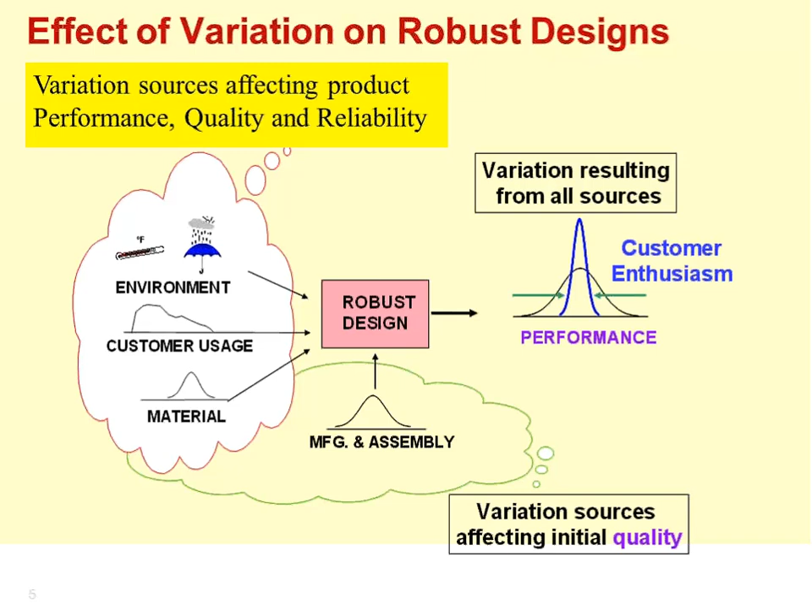So that is also a factor. Like I said, this is a pretty generic approach to engineering, but that kind of shows you the essence where Monte Carlo simulation can be very useful. So you're assessing performance, quality, reliability, and a lot of other factors. And if you understand your product well enough, and if you can model those input variables, you can have a pretty good understanding of what's going to come out as a result of your design.

Interesting thing is, when we were working on the 5th edition of this book, and I definitely wanted to include Monte Carlo, I did some search, and what was surprising, there's a lot of books mentioning Monte Carlo, books dedicated to Monte Carlo, but it seems like it's always kind of extreme. Either you get the book just about Monte Carlo with all details and modeling and all the hardcore mathematics going into this, or you get the book on the other spectrum where someone mentions Monte Carlo in maybe several paragraphs, or maybe a sub-chapter like 4.2.1, where it says, yeah, Monte Carlo is a great method, and you can model things and you can simulate inputs and get the outputs.

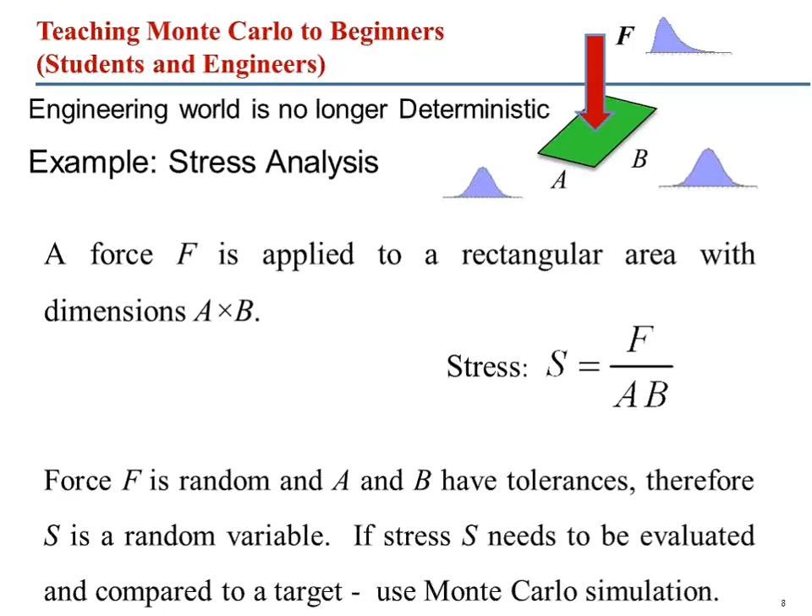But the question is, basically all those variables are random, and even though we think we know A and B, in the real world they have tolerances. And also force, in this particular case, I assign it as a random force. So again, stress is a random variable, and it needs to be evaluated and compared to a target. So I set up a target and say, okay, in my design, my stress should not exceed a certain value, and that's going to be my next slide.

Okay. So the next step here is I give them a really brief explanation of what Monte Carlo does. It's basically a brute force method, and we'll go back to that simple example where you have what's called a transfer function. In this case with stress, it's basically how you calculate stress. It's force divided by A times B, and then you have random inputs which you process with this transfer function, and you get the output. When you simulate those random inputs, your output obviously is also random, and that's what you get at the end and do the analysis of your output.

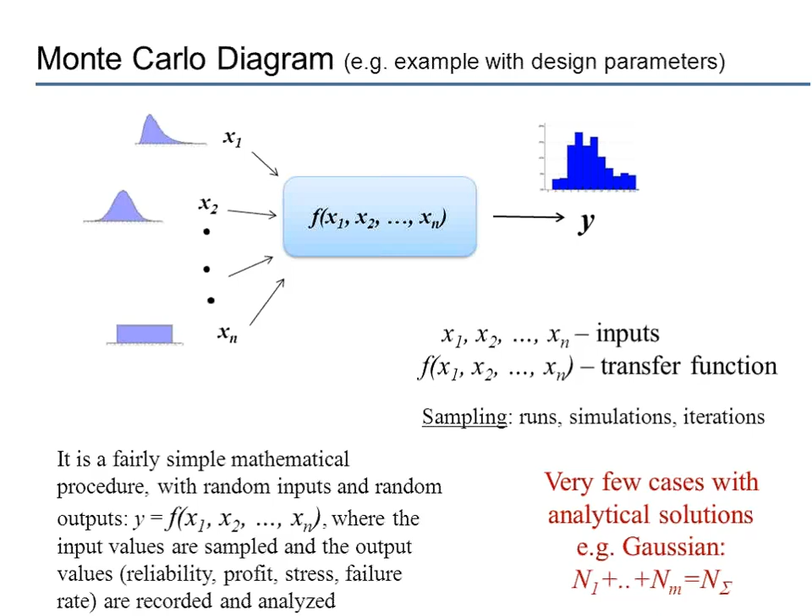And the key here is that when you have random inputs, there's really no way to solve this analytically, and the only case I'm aware of where you can solve this analytically is when you have a sum of normally distributed random variables, then your output is also a normally distributed random variable with the mean equal to the sum of the means, and standard deviation is the square root of the sum of squares. But that's the only thing I can think of. Everything else, Monte Carlo is pretty much, if not the only way, the best way to solve this.

Then I do a little bit of joking and say, okay, what do you need to run Monte Carlo? You need the latest XK6 Cray supercomputer. You need to have a PhD in statistics and specialized, very expensive Monte Carlo simulation software. But then I say, no, actually, you don't really need any of that, and you can do Monte Carlo pretty simply. You just need a regular PC, and a Mac will do the job just fine. You can't use your cell phone for that, at least not yet, but I haven't tried. You need a basic understanding of statistical distributions, both discrete and continuous. And you can start with simple Excel spreadsheets without even knowing how to use macros, just basic Excel.

So for that, we move into the section where we try to do Monte Carlo with just plain Excel. Most people know that there's a random generator built into Excel, called RAND, which generates random numbers between 0 and 1. But most people don't know that you can use that function to model pretty much any statistical distribution. You just need to use it a little bit differently. So when we start with the rectangular distribution, you can change that 0 to 1 to A to B by using this function, A plus (B minus A) times RAND.

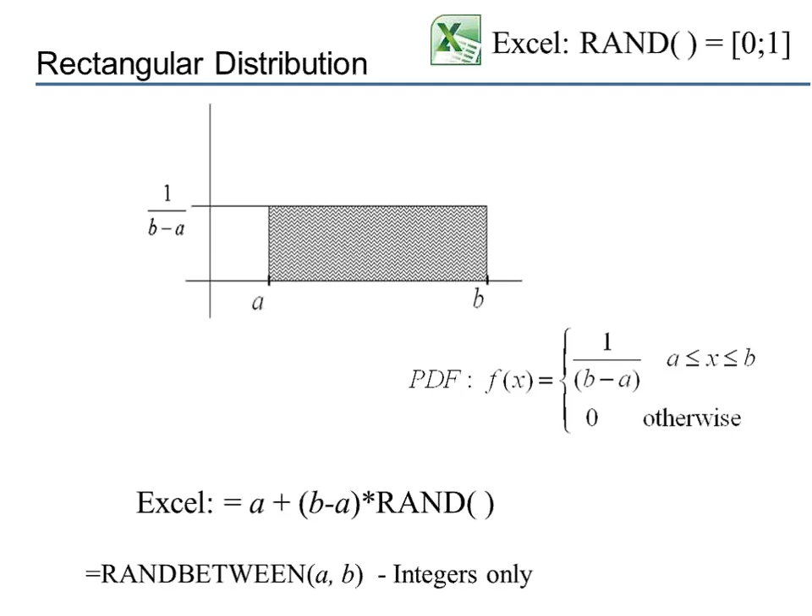And there's even a built-in RANDBETWEEN function, if you need to generate only integers, like if you're trying to model sales volume or attendance or something. Then there's also a very useful distribution, which is not a classical distribution, but is very commonly used by engineers, which is triangular, where you know the most likely value of a variable, and you know you cannot go below one value, in this case A, and you cannot go above another value, B.

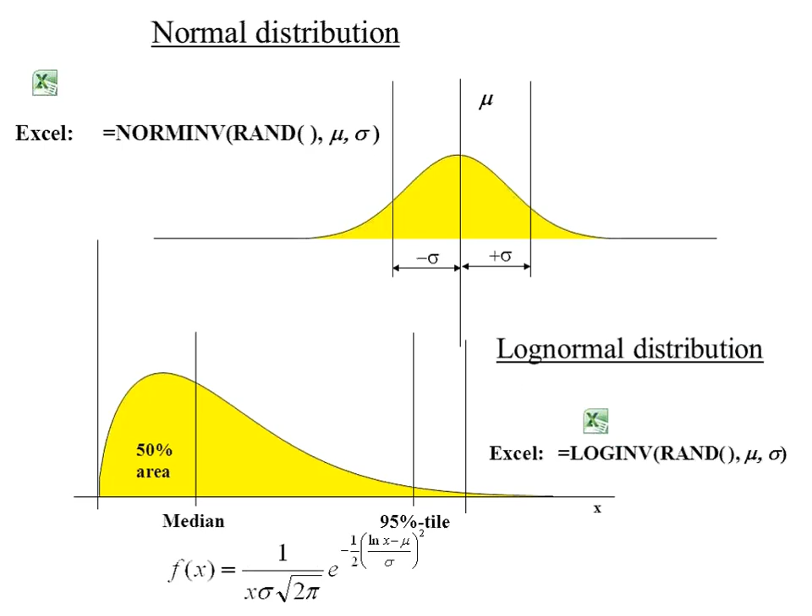Then actually moving to something a little bit more complicated, like normal or lognormal distribution. Most people on the call probably know normal and lognormal very well. And again, it's a pretty simple Excel function where you can model both, like NORMINV or LOGINV function, using that random generator. Again, it's there. It's just most Excel users don't know that.

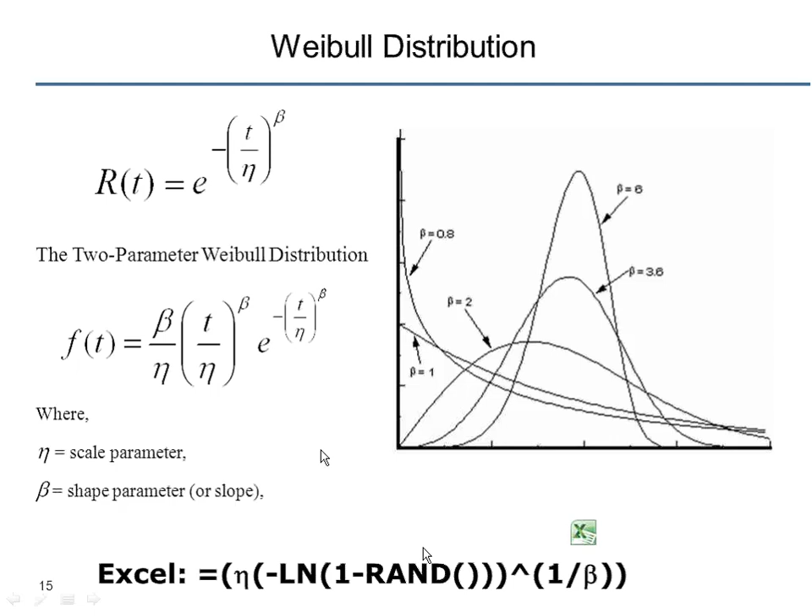Another popular distribution among reliability engineers is exponential, which is actually a special case of Weibull, and obviously it's even easier to model. But also in the book, I put together a table for many other distributions, how you can model them in Excel. So for the convenience.

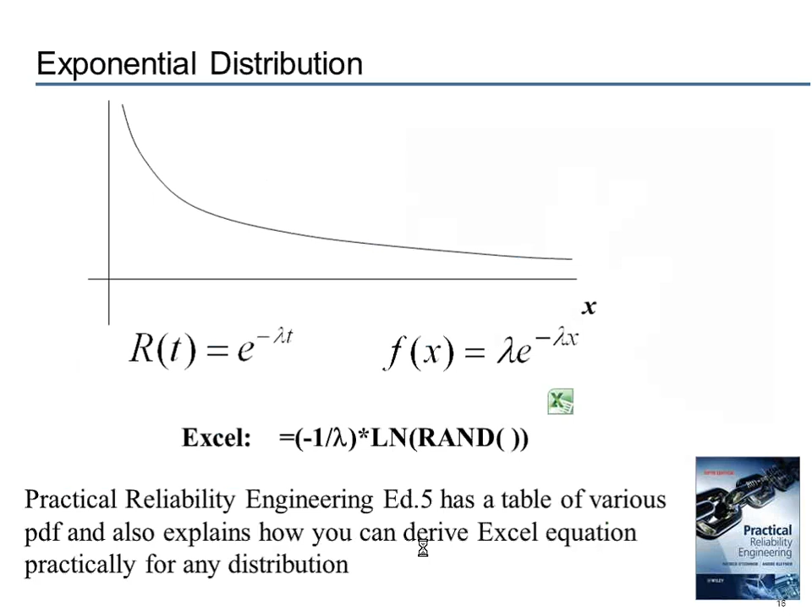So going back to that simple example, we have random force applied to area A times B, and we assign certain parameters. So A is 2 centimeters with a tolerance of ±1 millimeter. B is 3 centimeters with tolerance 1.5. And with force, I make it a little bit more complicated.

Let's say we don't know what this force is, but we can take some measurements and try to come up with an appropriate distribution. The structure is expected to function properly within the elastic strain range, where the probability of exceeding the yield strength of 30 megapascals, which is 30 times 10 to the 6 newtons per meter square, needs to be estimated. So the idea is to see what's the probability of exceeding that number with the data we're given.

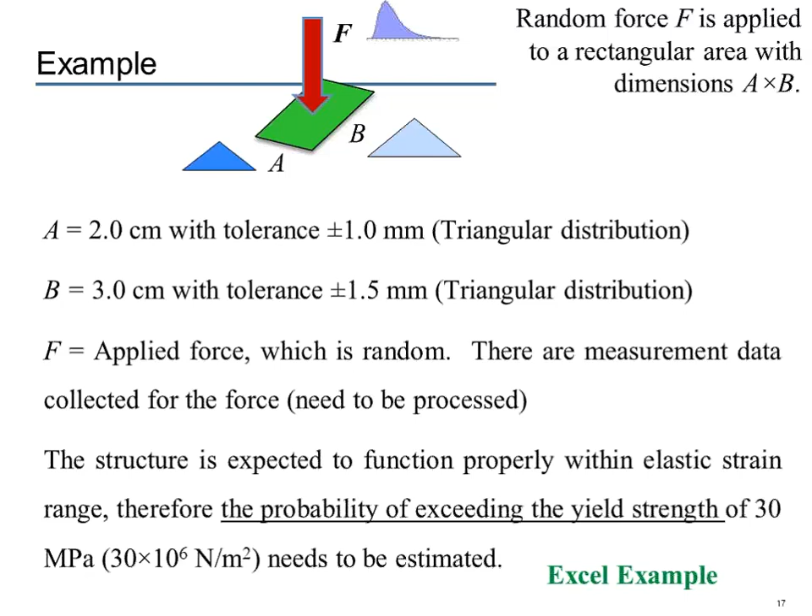Okay, so with that, let me go to my Excel spreadsheet. So again, the idea is to make a first step before moving to @RISK, to do a simple Monte Carlo simulation with what we have. I kind of cheated here a little bit and put most of the information in already, because when you start doing a demonstration, things just don't work for some reason, especially over the internet. So I already programmed the equation.

So here's my A, which I defined as triangular distribution right here. And here's how I modeled it, just a simple Excel equation. You can see it at the top. So it's 2 centimeters ±1 millimeter. Very similar for B right here. So here's the value, 3 centimeters ±1.5 millimeters. Now the question about the function.

Before, when using Excel, I actually assigned it: this is the distribution, just use this. But since most of the people on this call are @RISK users, I'm going to use distribution fitting. So right here, I hope you can see what I highlighted. Basically, I collected 200 data points. I took those measurements of that random force, and now I'm going to try to find the best fit distribution for it.

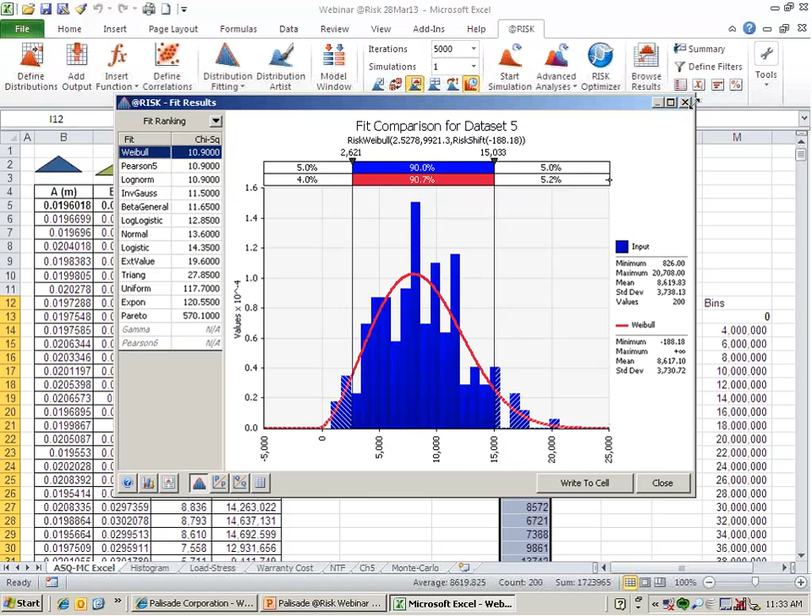So here are the parameters. The beta, or the slope, is 2.52 something, 9921. With students, I only have 1 lecture, so I don't have much time to go into best fit distribution. But again, here I collected the data. So I'm just going to program the distribution I just found using best fit into this cell D5 as a Weibull distribution right here.

So basically, we are pretty much done. We got A, we got B, we got F. And to calculate the stress, all I need to do is divide my F by A times B.

But since we need to do many runs, and there's different ways of doing it in Excel, but the simplest way is just to copy this whole thing down, and I'm choosing arbitrarily 2,000 runs. So I'm basically copying it down for 2,000 rows down. And as you can see, in each row, I get my own set of A, B, F, and the resulting stress. So, okay, let me remove this.

Like I said, I tried to do something beforehand. So what I get at the end is the column E, which is the column of 2,000 values of my stress. And I can do a lot of things with that. So I looked at the mean value, standard deviation, minimum value, maximum value. But what I'm really interested in is what's the percent of those values exceeding my maximum allowable value, which is

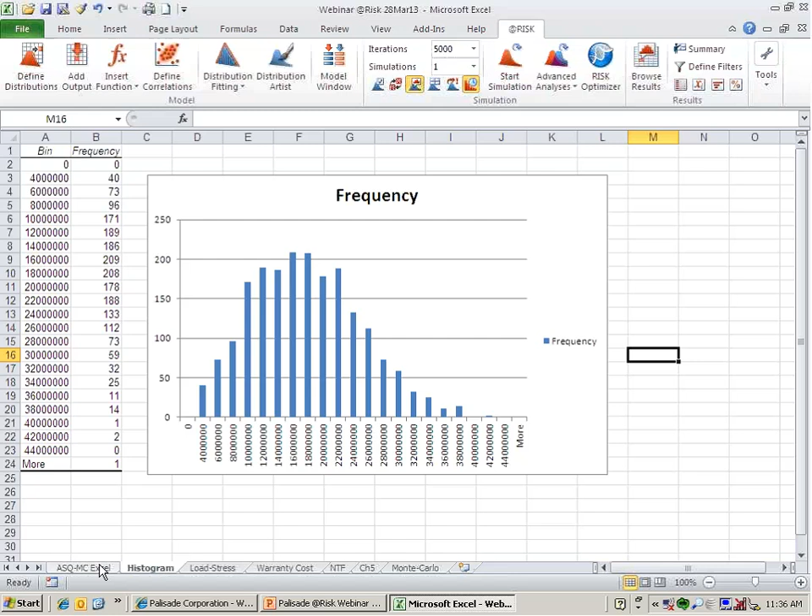And also, if I know how to use @RISK, I can actually see what kind of a distribution I'm getting at the end. So I'm going to do a fit distribution to the data. Okay, so it tells me it seems like beta general or gamma. Let me go to Anderson-Darling. Yeah, actually it seems like my resulting distribution for the stress is also shaped as Weibull.

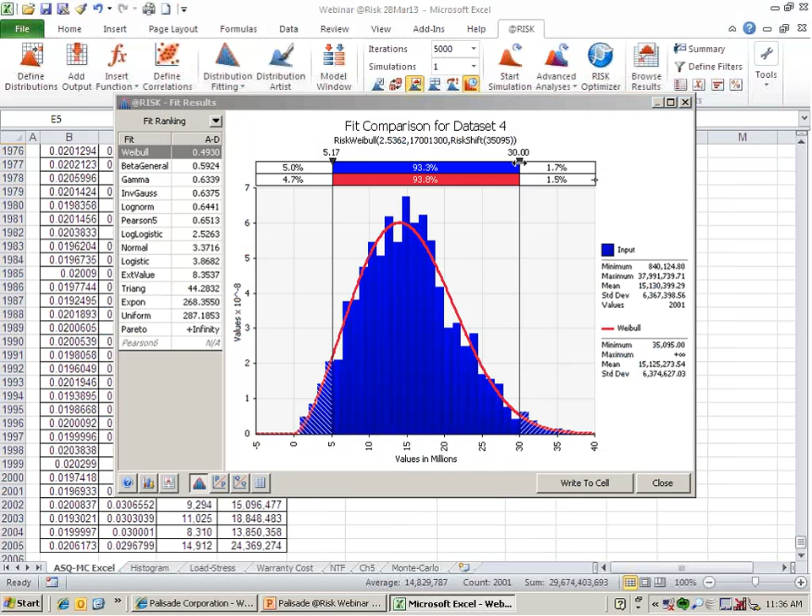And this thing will tell me if I move this. Okay, so it tells me I'm about 1.5%. My tail above 30 megapascals, about 1.5%. But when I teach it to students, we're not there yet, because we're still within the realms of Excel, and that's where you get all the statistics, percent, and you can do a histogram and just see how your data looks.

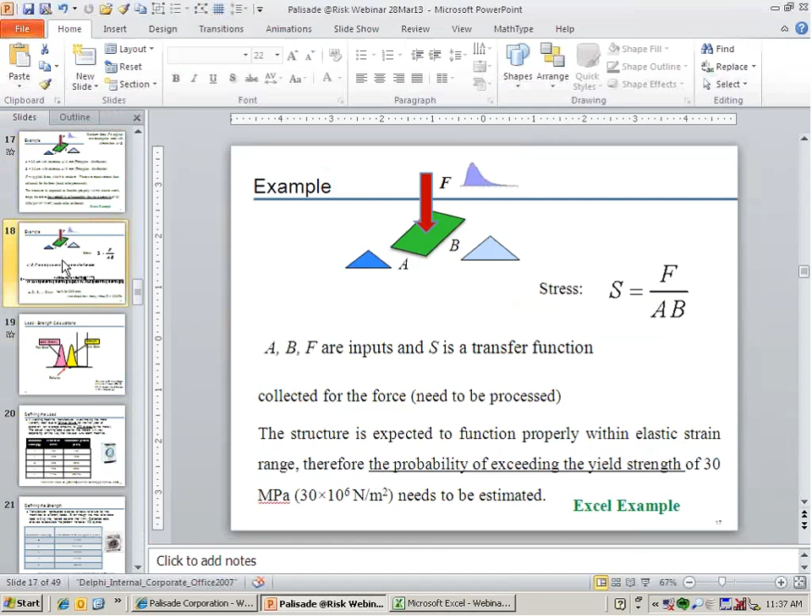And again, going back to my presentation, just for simplicity, all we did is programmed this equation in the middle. Let me get a little more fancy. I'm going to annotate this. So this is the equation which ended up being programmed in that cell, where all you're doing is basically calculating the stress as a ratio of 3 random variables and doing 2,000 rows. And like I said, that was an arbitrary number. Okay, let me go back.

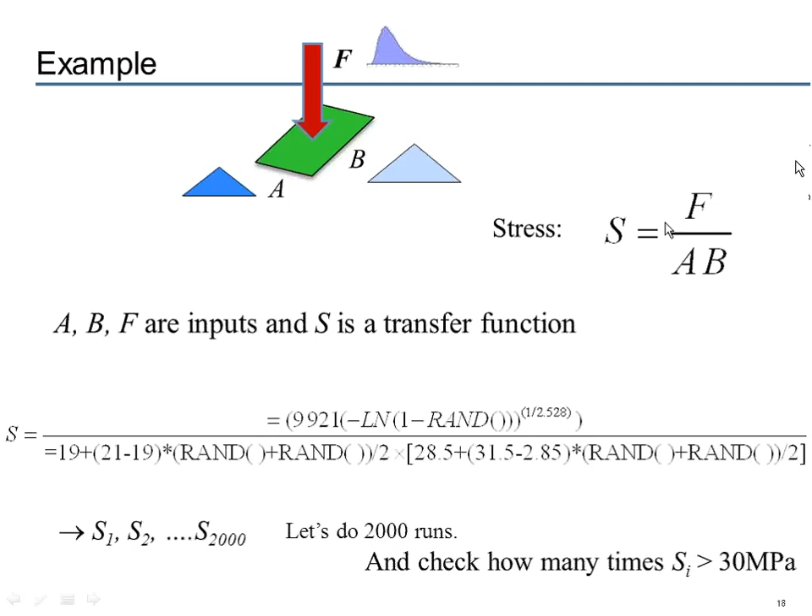Okay, so moving on to something a little more complicated, which is quite popular in reliability, is what's called load strength calculations, sometimes referred to as stress strength calculations. I know there was a Palisade webcast in October by Dr. Naresh Samtani, who talked about this a little bit, but as it applied to civil engineering, and I believe civil engineers use the term load resistance. But I'm going to be staying within the realm of reliability engineering, so we use mostly stress strength or load strength.

But the idea is, I wouldn't call it very simple, but simple enough. So you have strength when you design your product, and there's certain ways you can measure strength, and that doesn't have to be physical strength. It may be variation of your output parameters or performance. And you also have load or stress you apply to your product. And the idea is very simple: where the load or stress exceeds the strength of your product, and again, it doesn't necessarily apply to mechanical properties, that's where you have failures, where stress kind of kills your product because your strength is not good enough.

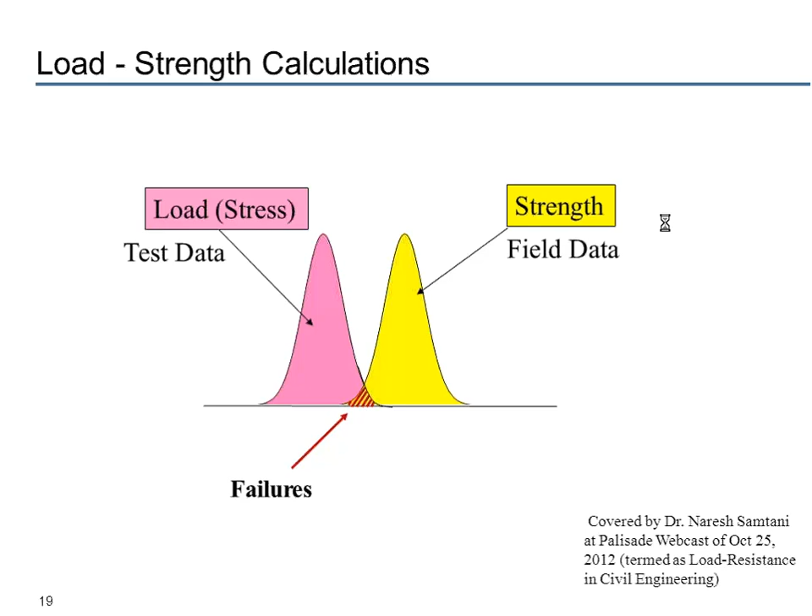Again, there's a lot of variance, and that often creates a problem to actually gather the data and understand the parameters of those distributions. We're going to do one example, which I simplified for presentation purposes, just to give you an idea where you can gather data, and maybe in your practice you can do something similar and estimate your reliability up front or see how well your product is performing.

So here's an example with the washer. A washing machine manufacturer is estimating the motor warranty due to fatigue failures for the first year of operation. On average, that amounts to 100 full cycles for the motor. Don't read too much into the actual values; some of them were made specifically for the example, but in your practice you can do similar measurements and come up with your own numbers.

So the actual washing load sizes for the motor vary depending on the way the users run each machine. Obviously someone puts a lot of clothing in it, some people maybe not. So here's the data with maximum loads. The data indicates that 4% of the people use a maximum load of 2 kilograms, then 42% get up to 3 kilograms, 40% up to 4 kilograms, and that's what you see in the middle column.

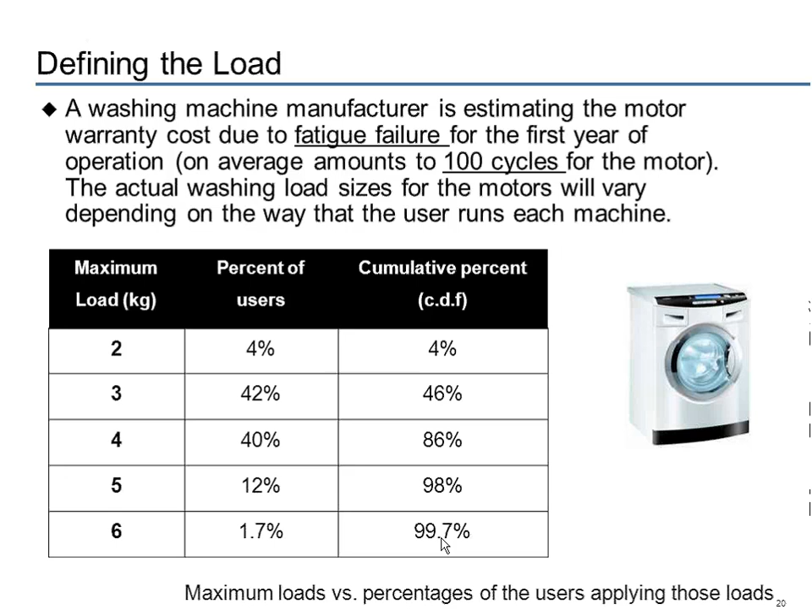Now we're trying to take this data and convert it into a cumulative distribution function, and that's what you see in the third column. It's nothing but adding those percentages in the second column together. So 4, then 4 plus 42, then plus 40 is 86, showing that 99.7% actually don't go over the maximum allowable load of 6 kilograms. That gives us an idea of what kind of load, or stress, we're dealing with.

Now let's move on to defining the strength, which can be pretty tricky in real life. But in this example I'm simplifying things a little, and you can probably use the same concept. In this case, the manufacturer conducted a series of tests to failure at different machine loads. Even though the maximum allowable load is 6 kilograms, we know people don't follow that. So we did 5 series of testing at different loads, like 4, 5, 6, 7, and 9. That's what you see in the left column.

Doing tests to failure, we learned that at the maximum load of 4 kilograms, 2.73 percent failed at 100 cycles. That's the second column in that table. It's not necessarily that we saw that at 100 cycles; there are different ways of running tests to failure. Maybe we exceeded that number. Those are details, it can be done different ways, but here's what we learned.

When we run at the maximum load of 5 kilograms, a little over 10%, again the second number here, failed at 100 cycles. At 6, 20.6%, and so on. So now we have some idea about the strength of our product. Now we need to put this together. So let me go back to my Excel spreadsheet.

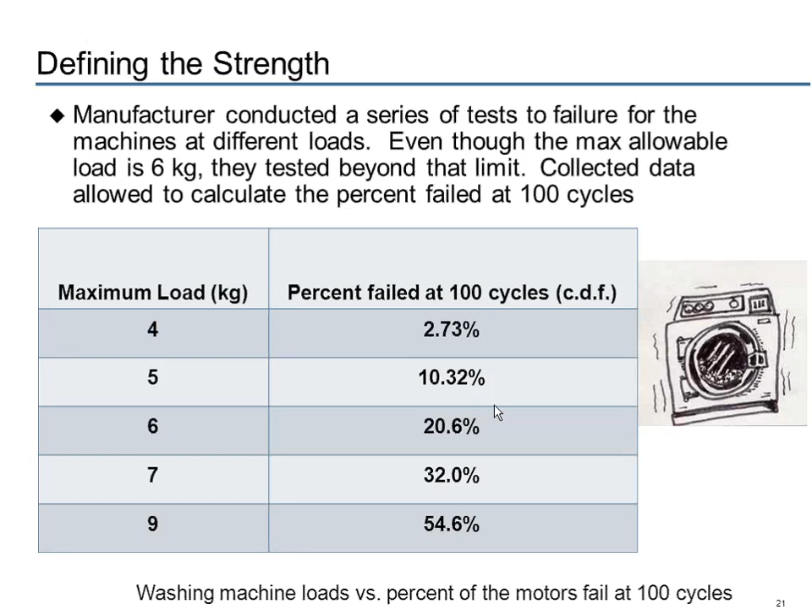I did a little bit up front, because I wasn't sure if everything was going to work as designed. What you see here at the top, I'm highlighting it, are just the 2 tables I showed you in the presentation. Now what we need to do is turn those tables into actual distributions. I'm again going to use distribution fit, but in this case it's not just simple data. We're dealing with something similar to a cumulative distribution function.

So what I'm going to do is try to fit a distribution to this data. But now instead of just continuous simple data, I'm going to use cumulative. For cumulative, I need 2 columns of data, and that's what I have: maximum load and percent users. We're still talking about the load. So I'm going to fit. Okay, so that's how it looks.

Gives me inverse Gauss, log normal. Actually in this case, since I'm analyzing cumulative data, it's a CDF type data, so it doesn't give me too many options. Basically curve fit. Okay. So it seemed like my best choice is inverse Gauss, and so that's what I put in this cell, which says load.

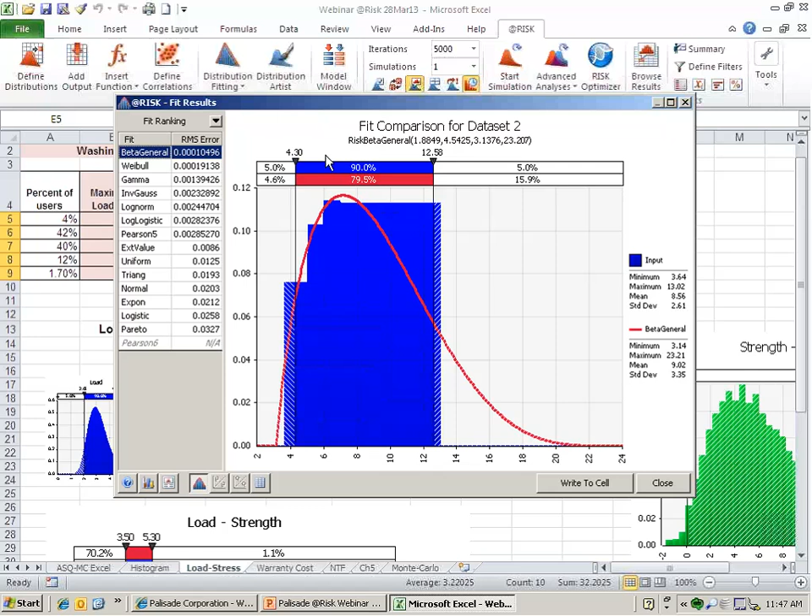Now I'm taking this data. Now I'm trying to estimate my strength. So I'm doing pretty much exactly the same thing. Cumulative. Okay, that gives me beta general. Okay, sounds good. And then I program those as risk outputs, as load and strength. But again, what I'm interested in is basically cases where my load actually exceeds my strength.

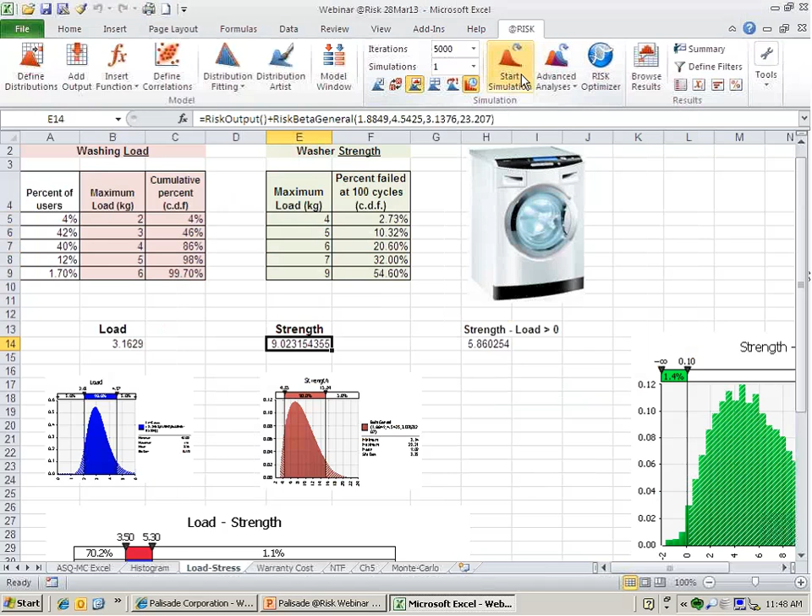So I also create another cell which is the difference between strength and load. So now I'm ready to run Monte Carlo simulation here for each one of them, but mostly I'm interested in this difference between strength and load. Okay. So let me, yeah, like I said, I ran most of those in advance, run simulation.

Okay, you could probably see the window changing. What I'm going to do now, I'm going to stop this just to save time, since I already created those charts. Most of you know how to use Monte Carlo, so you know what's going on here. So I'm going to stop this simulation and show you the results.

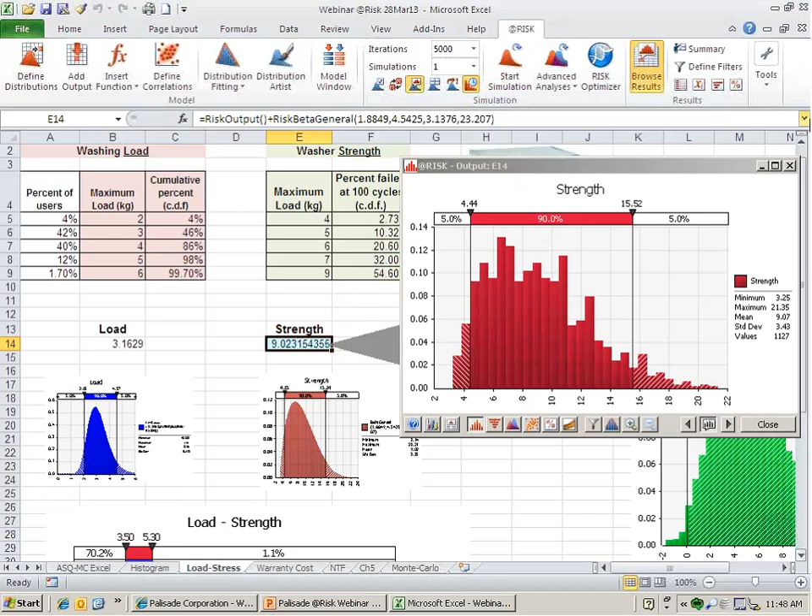So first of all, here's a graph I created, and that's my simulation of strength minus load. It should be greater than 0, but there are cases, 1.4%, when it's actually less. So that's what I'm worried about. This gives me the idea of what my unreliability is going to be, which, like I said, in this case is 1.4%.

Also, if I want to get fancy with @RISK, then I can overlay two graphs together, load and strength, and show where they overlap. And again, where they overlap, that's where I don't want to be.

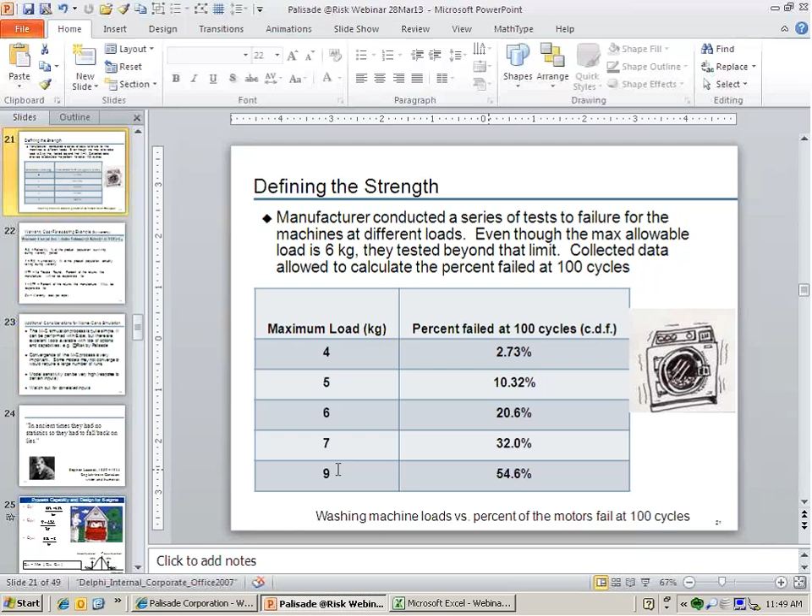Okay, we still have a few minutes, so I'm going to move on to the last example. I have many more, but with the time we have. So the next example, and where I've probably used Monte Carlo most, at least a few years ago, is warranty forecasting. For presentation purposes, I made a really simple example. In reality, those models are much more complicated. But the complexity is not in modeling, it's just more variables, and for the presentation it would just make things more complicated.

So here's my warranty cost. Again, it's a very simplified model. But in automotive, most standard warranties are still 3 years, at least on most parts. The way to calculate it is take the sales volume, basically the total population of parts in the field. Then I multiply it by my unreliability, since reliability is the percent which survive, but I'm interested in the percent which will fail, so 1 minus my reliability at the 3-year mark.

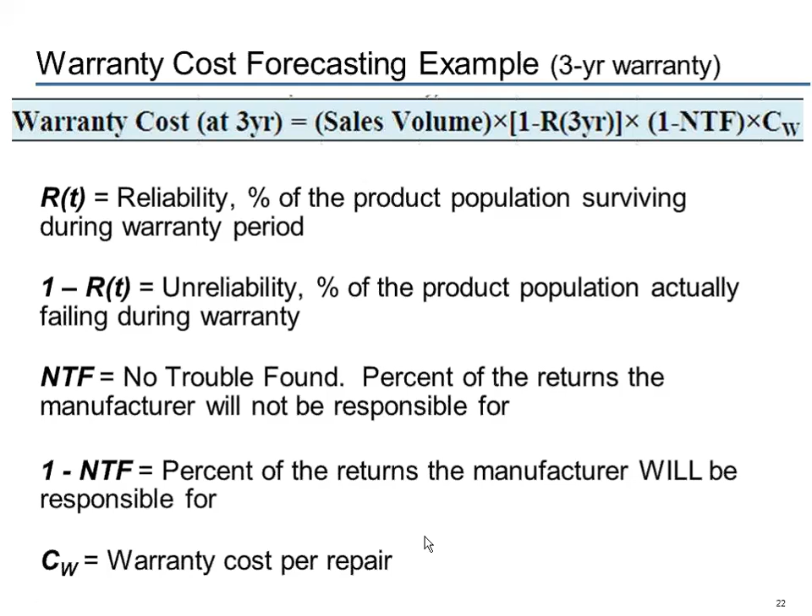So again, sales volume times unreliability, % fail, times 1 minus no trouble found, something I will be responsible for, times warranty cost per repair. Okay, so let me go back to my Excel spreadsheet. I'm trying to make it more visible using colors. But again, here's that main equation with warranty cost, 3 years.

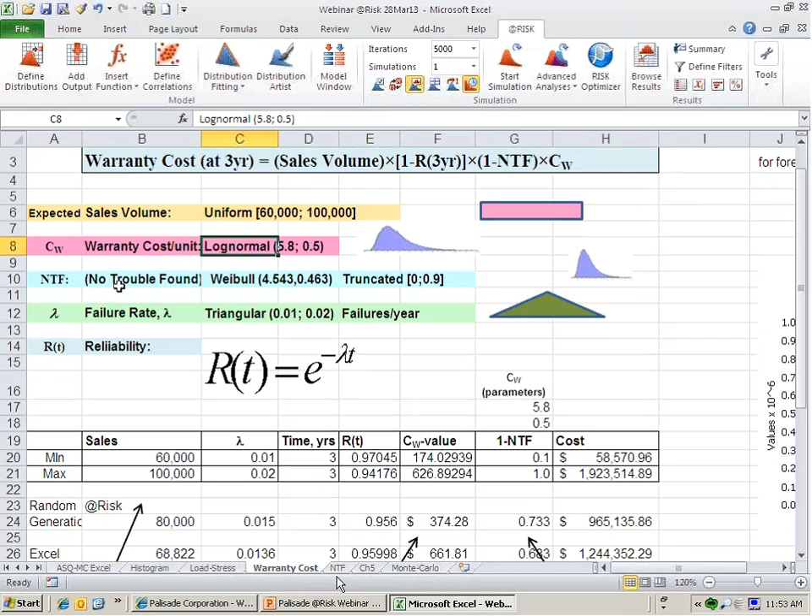And modeling warranty cost per repair, again, I have access to my database with cost of repair, so I'm analyzing that and coming up that the best distribution fitting it is lognormal. No trouble found. I can actually show you the data where this particular case came from. So again, as applied to automotive warranties, let's say we're looking at vehicle components, and I'm not naming them for obvious reasons, but let's call them vehicle component 1, 2, 3, 4.

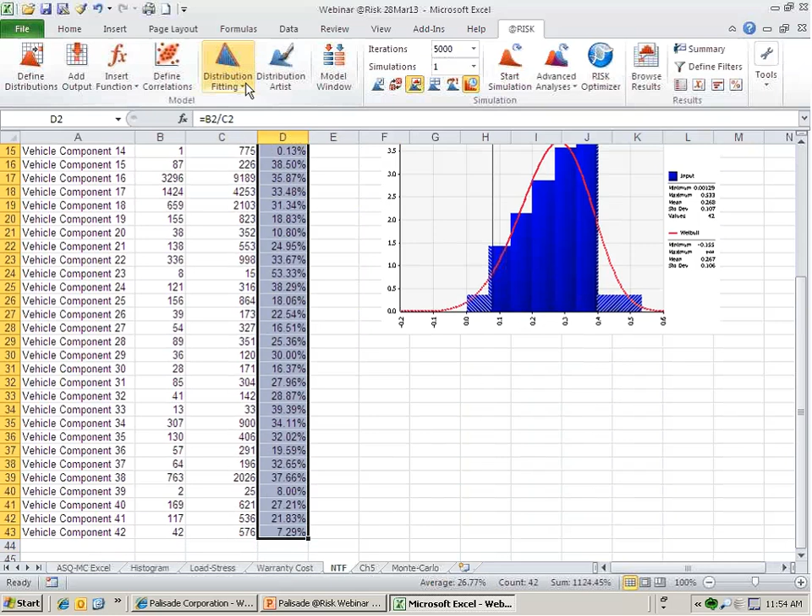So I have a % of no trouble found and total parts which came back. So in this case, in row 2, I had the chance to analyze 843 parts, and it turned out that 125 of them, there was nothing wrong with them. So here's my %. So basically, I collected, in this case, 42 different components, and do the same thing with distribution fit. In this case, it's just continuous sample data and do the fit.

Okay, and funny, Weibull also comes up. I swear I didn't set it up like that.

But what is important to remember in this particular case, we talk about %, it cannot fall below 0, and it cannot go above 100, or 1 in this case. And Weibull does have tails, and in this case actually has a shift. So it's important to model it correctly. So not only using this particular distribution, I also need to truncate it, make sure this number will never drop below 0 or go above 100% because it's just not realistic. So this is also something to remember.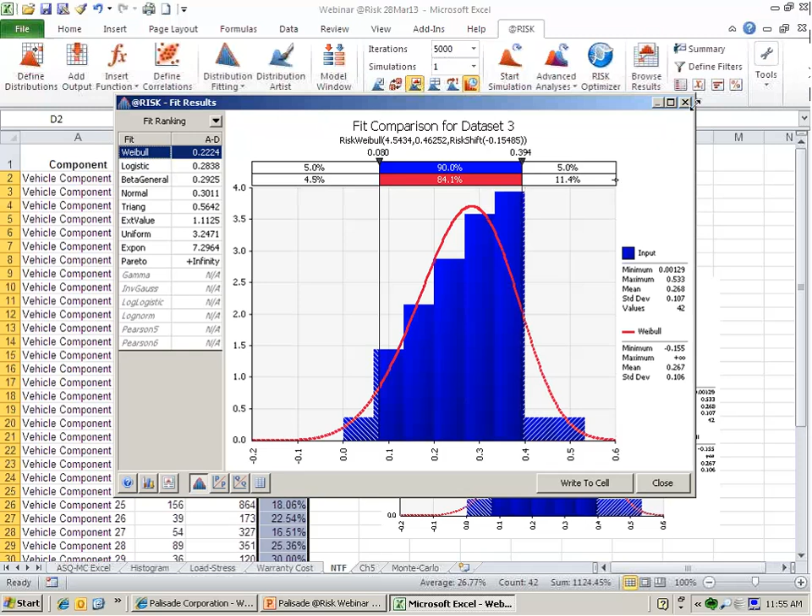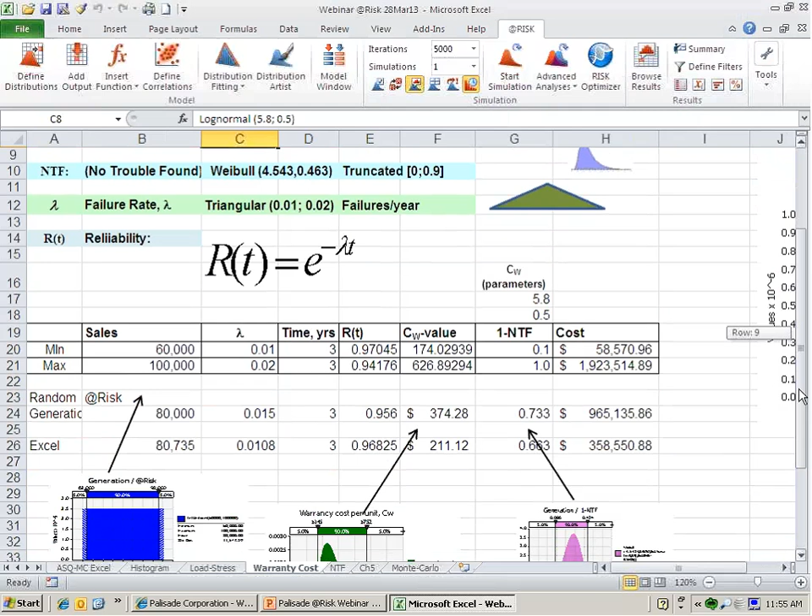Okay, so here's my data. Now I'm going back to my modeling spreadsheet. Okay, so basically all I'm doing is programming this equation, warranty cost. Here's my NTF. Another thing I'm doing here, just to make it interesting, I'm using the reliability equation as exponential distribution, and in this case it's actually written in deterministic form because you know time, you know lambda.

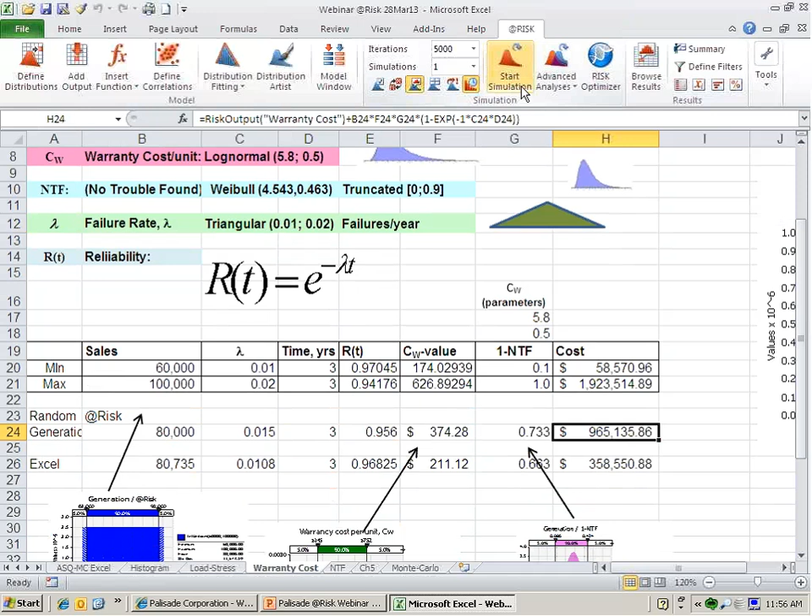So in this case, I made my lambda, which is failure rate, the parameter of that reliability distribution, a random variable. I just model it as a triangular distribution with a failure rate between 0.01 and 0.02 failures per year. I made it per year for simplicity because my warranty is calculated in years. Okay, so with that, risk output. Again, I'm going to start simulation here.

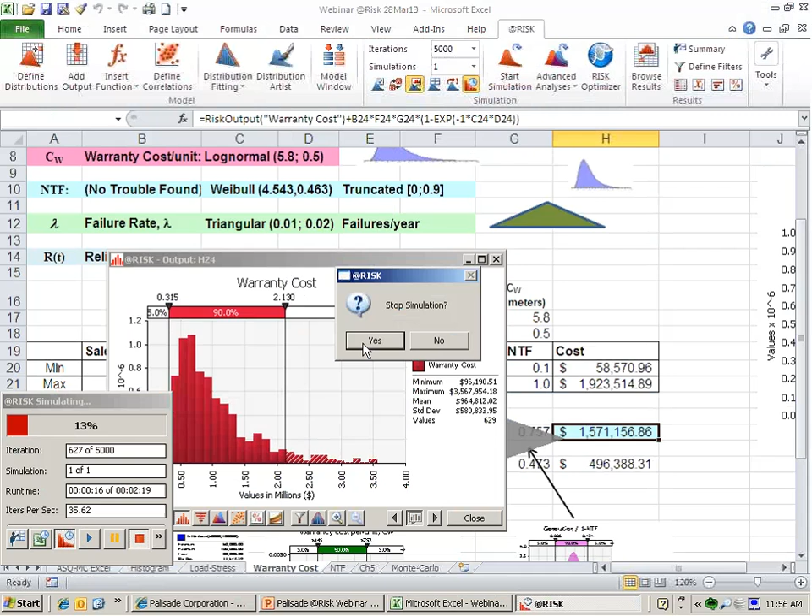Okay, this is my warranty cost. I'm going to stop this simulation. It's just showing the warranty cost, and I already ran this. It was just going to show the method. And where's my graph? Oh, there you go. Actually, it came out a pretty nice histogram right here. So my value is in millions.

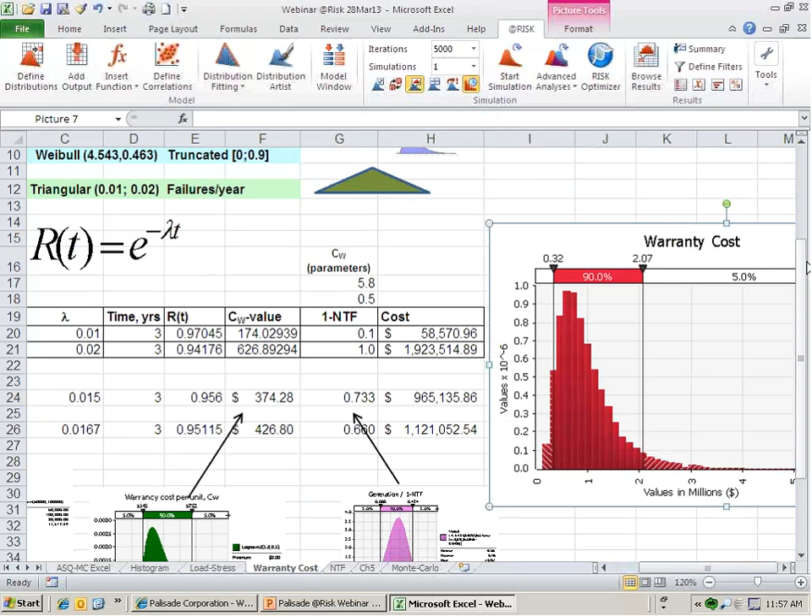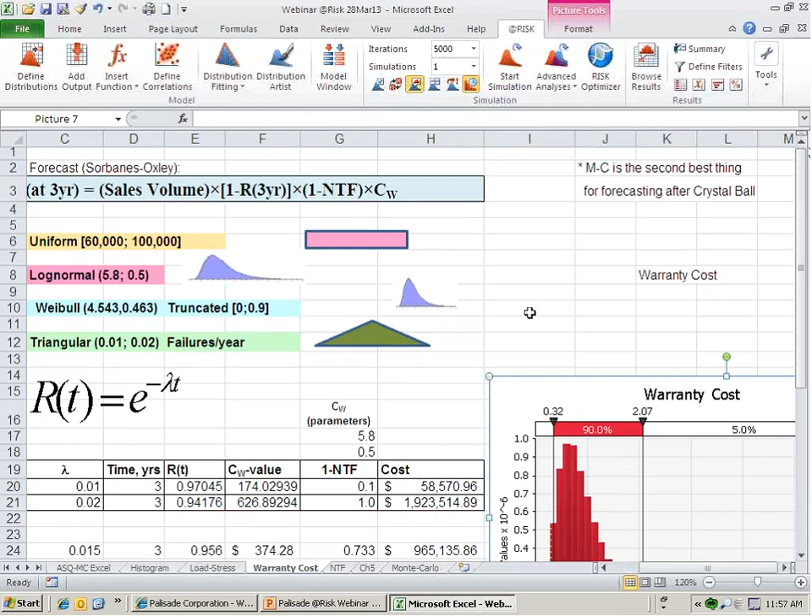And obviously, once you get this result, you can do a lot of things with it. You can estimate what's your maximum, what's your mean at 50% confidence, but if you want to be a little more conservative, you can also look at the higher confidence levels. And this is important because the warranty cost is something which is built into the product. You start selling the product today, but according to the law, you already need to accrue a certain amount of money for future warranties, and that's a law in many countries. So warranty forecasting is actually quite important.

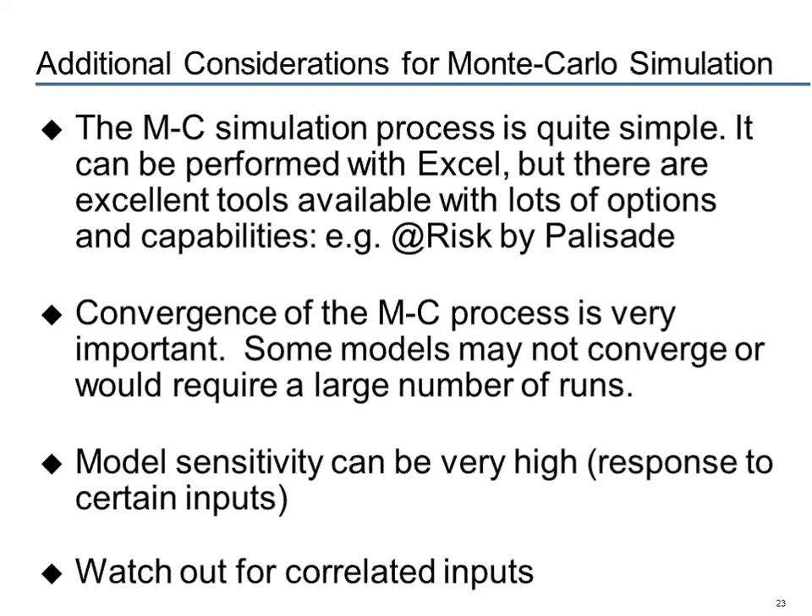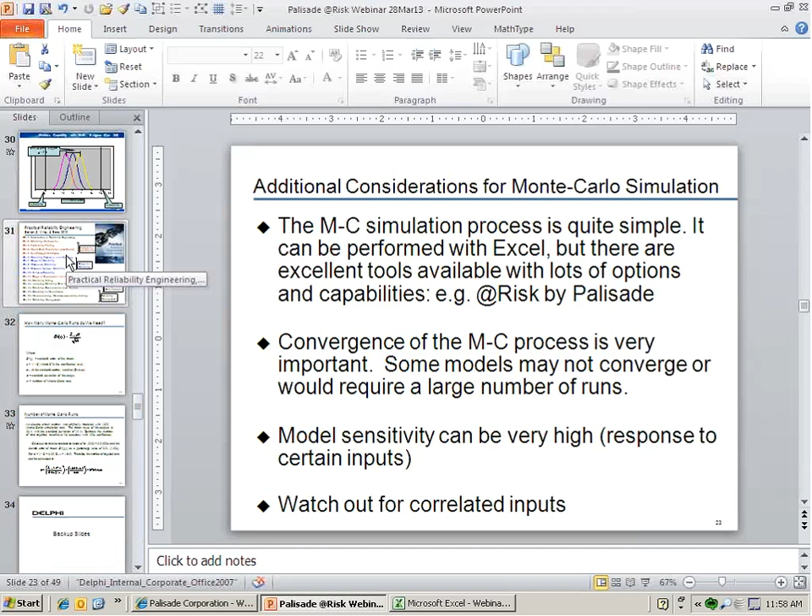Okay, so with that, I'm almost finished here. I was going to talk a little bit about other considerations like convergence and model sensitivity, which can be very high to certain inputs. Correlated inputs, sometimes we forget about them, and they can mess up your model because you assume they're not correlated, but actually a lot of inputs are correlated together. And @RISK has a wonderful way of addressing that, where you can model your inputs as correlated inputs.

Here's my last slide. I wanted just to go back to a book. I don't know if in your field you're interested in reliability, but if you are, it's probably a pretty good source, especially if you're a beginner, where it gives you an overview of reliability from a practical standpoint.

Because a lot of books on reliability actually have a lot of mathematics in them, which is fine. But again, if you're a practicing engineer, in a lot of cases it's just way too much. You need something more practical, something you can apply, like how to do tests, how to write a test plan, and how to analyze your data without going into fancy mathematics. And I think this book actually serves this purpose quite well.

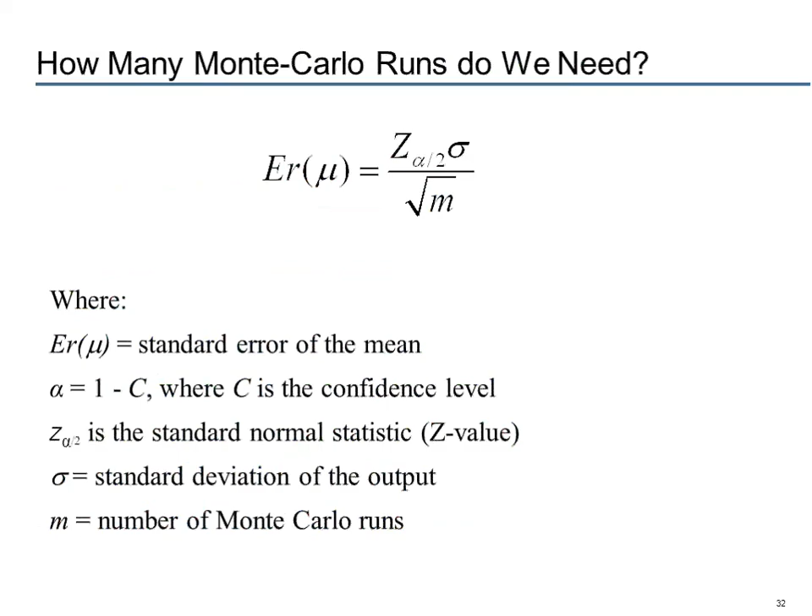And the fact that it went through 5 editions also helps to make a case that it did pretty well.